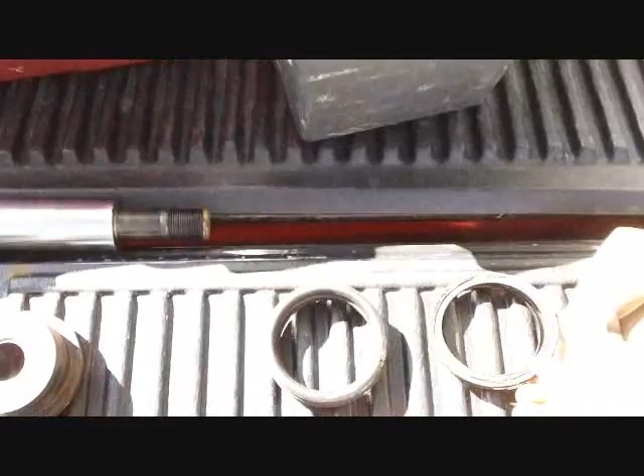Next up we look at this mess. Okay, so here's what we had in there. We had that type of chevron seal, almost kind of like a rubber cap. And then this material, another one of that, another one of that, another one of that, 4 of those, and then this big backing thing.

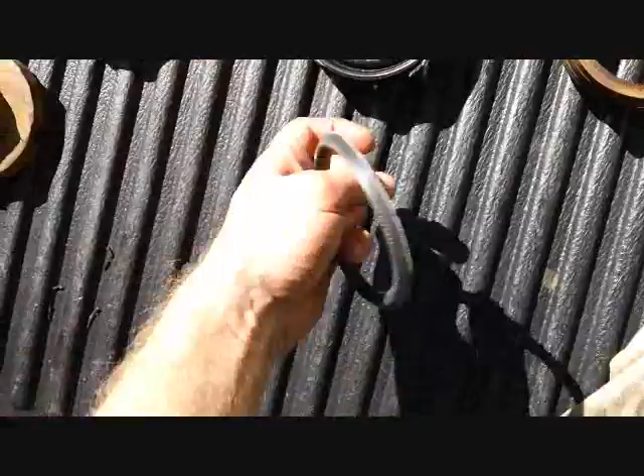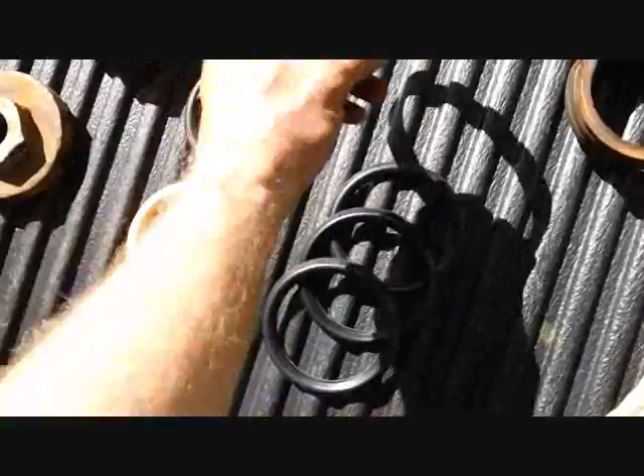So what did the good people at Mechanics Bliss give us? They gave us this solid looking ring, one of those, one of these, 2 of those, 3 of those, this rubber looking thing, 4 of these. Oh, that's different. Oh, wait a minute, hold on, what do we got here? This is solid, these aren't. This is different. What do we got here?

That. Oh, okay, that. 1, 2, 3. Alright, so we got these 3. Look like these 3. Let's do it this way. Old up top, new down bottom. Then we got, alright, this one, it's deformed, but it looks like this one. Alright.

And there's this and this. This is this. So then this big mess right here is, oh okay, it must be this gets put together with this to make that. Well, I don't like this. Oh, we got another potential problem here.

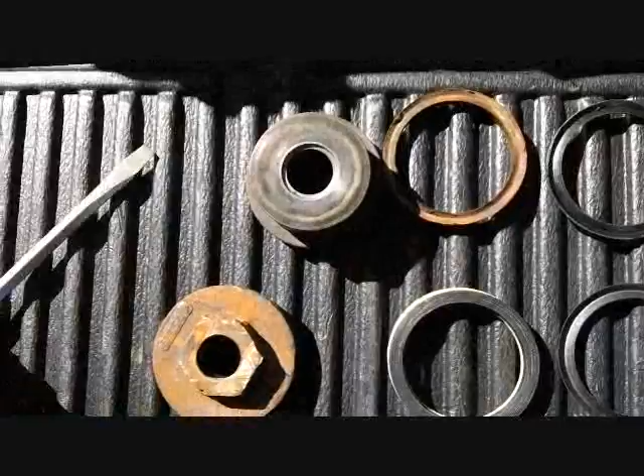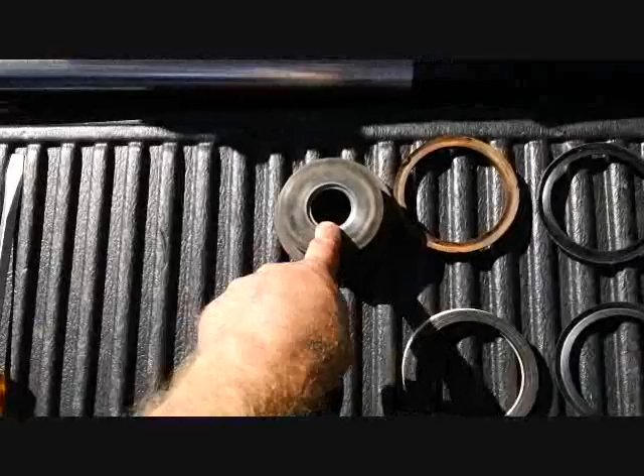I think when we took this apart at Gary's, what was in there for seals and everything was pretty shredded. But it almost seems to me like there might have been remnants of an O-ring that went in this groove. How critical that's going to be, I don't know. Since I am lucky enough to have the parts manual from the original Ware setup, I wonder what that shows.

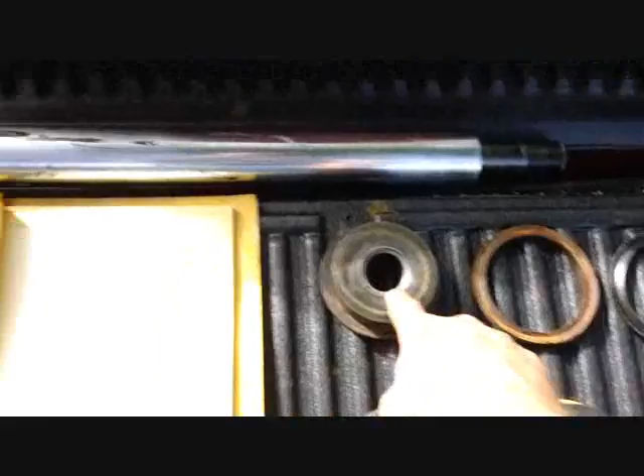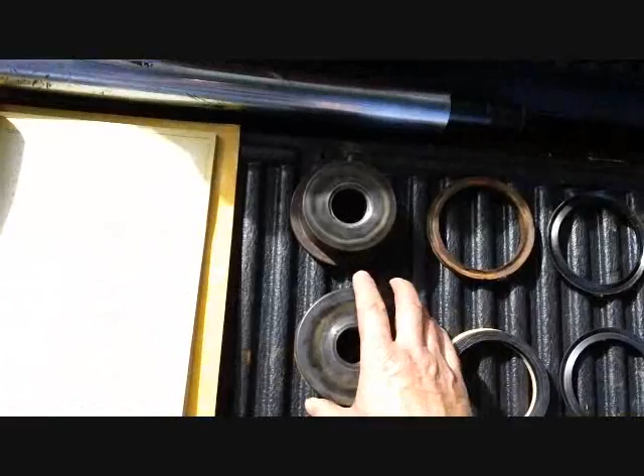Alright, so according to the instructions here, it wasn't evident right away, but when I read through it the second time I realized that, yeah, they make reference to an O-ring. So it looks like the O-ring goes in this groove, and then when this is tightened down, the O-ring is compressed in between this discolored area right here and in the groove to create a seal. So apparently nothing seals between that edge and there.

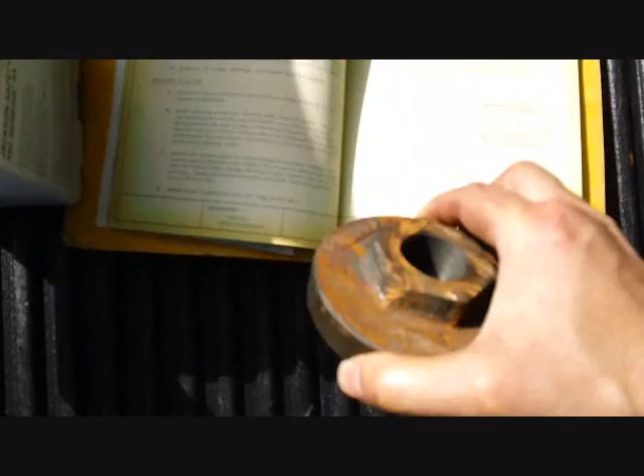So I guess any oil that works its way down that bore is stopped by the compressed O-ring, which I'm assuming they're figuring it'll be a negligible amount, otherwise they wouldn't rely on just an O-ring to do it. Disassembly of Ware cylinders: clamp the cylinder in a vise, loosen top nut. That's this. It's interesting, they almost talk about the top nut as being a separate piece than the ring here.

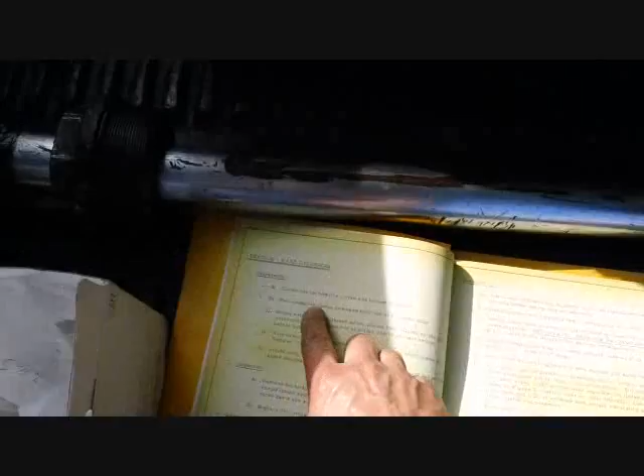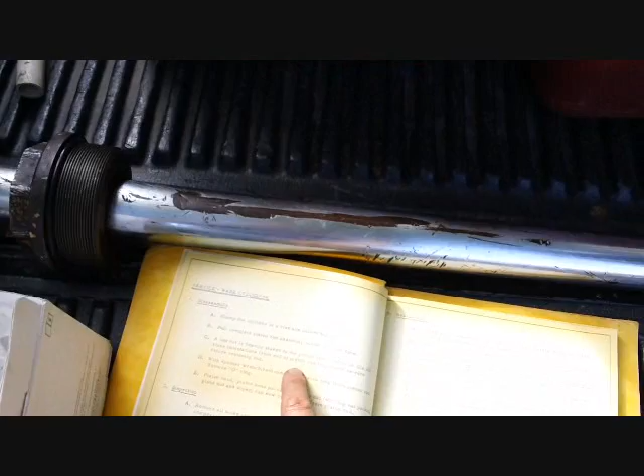Clamp the cylinder in a vise and loosen top nut. Pull complete piston rod assembly out of cylinder. A hex nut is heavily staked to the piston rod. Grind or file off stake indentation from end of piston rod to prevent seizure before removing nut. With spanner wrench, remove compression ring from piston rod. So that's almost like they're saying this would be a separate piece than this, but it's not. Okay, so they're talking about this is the compression ring.

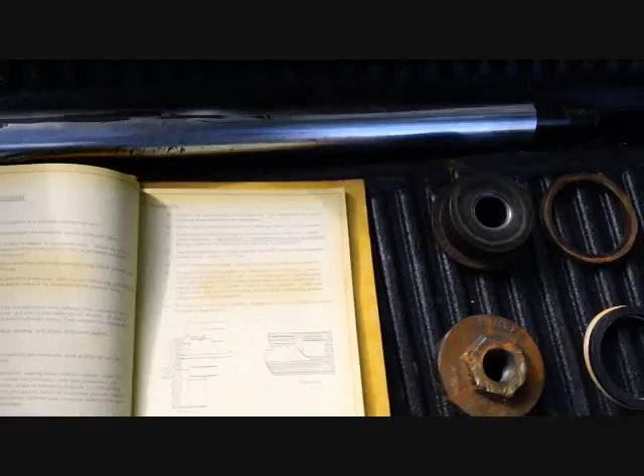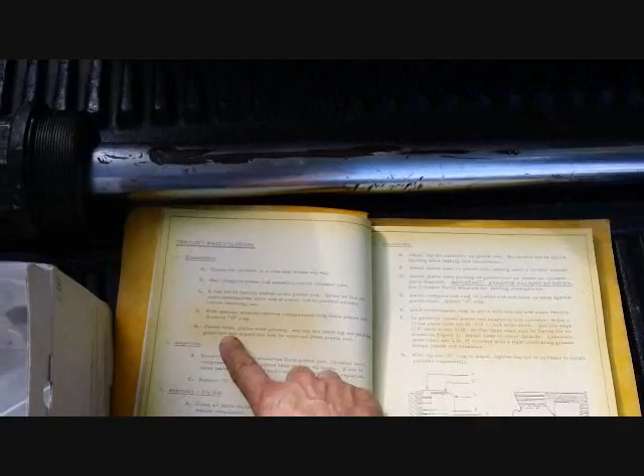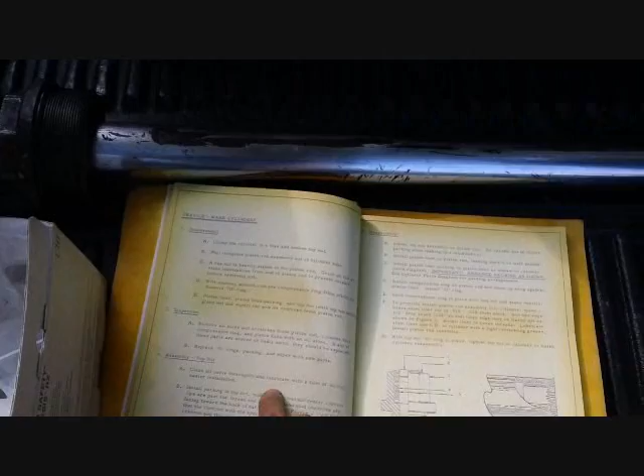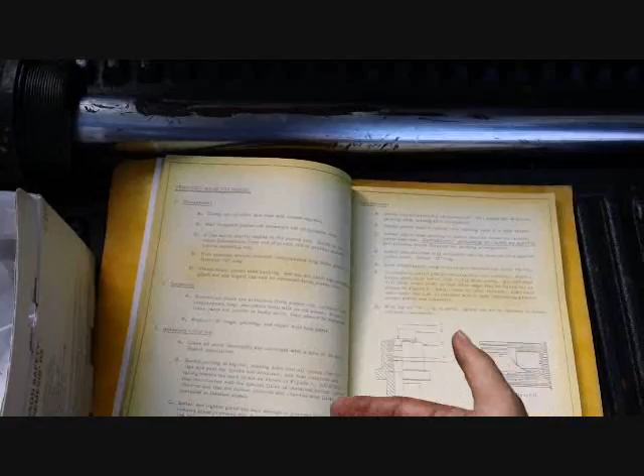Let's see. At that point, the piston head packing, and top nut, with top nut packing, gland nut and wiper can now be removed from the piston rod. That's where we had all that stuff off. It talks about blah blah blah. Replace the O-rings, the packing, and wiper with new parts. Assembly of the top nut: clean all the parts thoroughly and lubricate with a film of oil for easier installation. Install packing and top nut. Talks about what we talked about, the chevrons, making sure which way they go, what side the solid rubber filler is supposed to be on, all that.

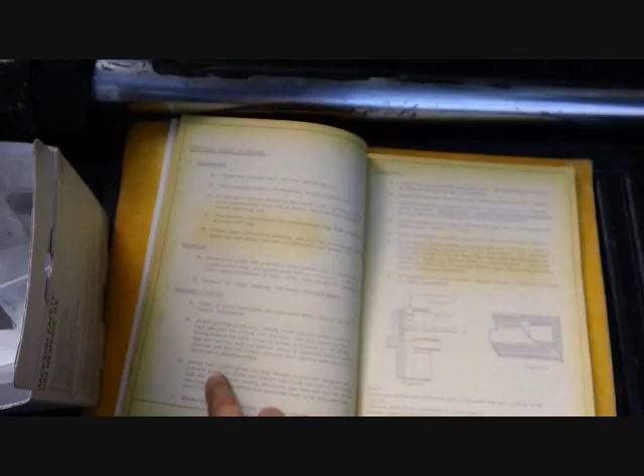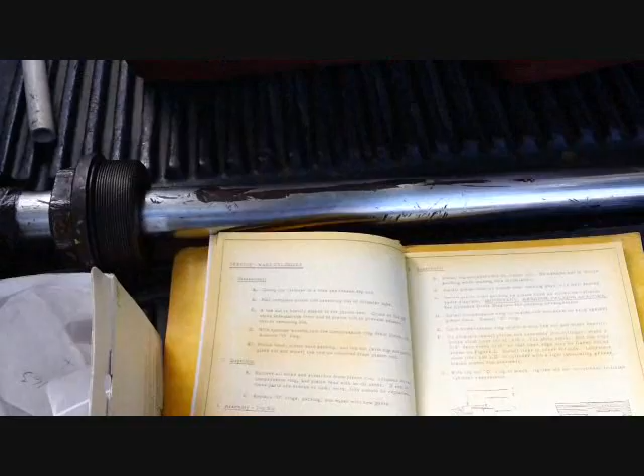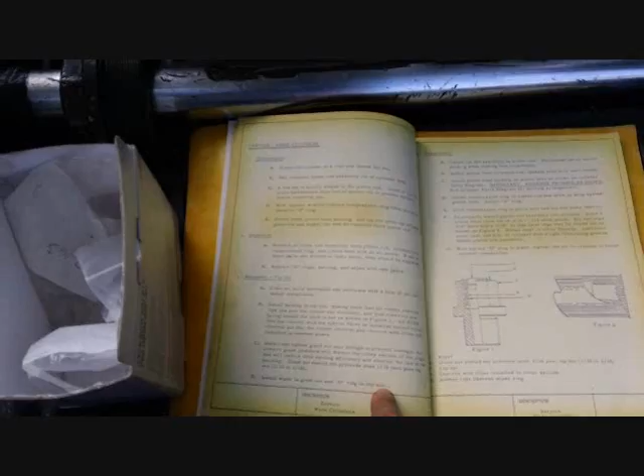Install and tighten the gland nut only enough to prevent leakage. Excessive gland pressure will distort the cross-section of the rings and will reduce their sealing efficiency. So we don't want to do that. Goes on to say the gland nut should not protrude over 1/16 of an inch past the top nut. We'll have to check that later. Install wiper in gland nut and O-ring in top nut. Okay, so that's the wiper that they're talking about.

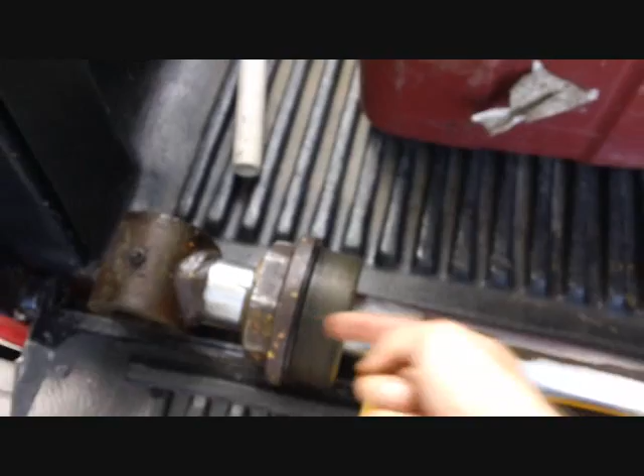And the top nut O-ring they're talking about is this one, which was a flat piece of rubber when I took it apart, but maybe it was just a completely compressed and squashed out O-ring. Either that or the previous people put the wrong thing in there. Install the top nut assembly on the piston rod. That's what we did there. Install piston head on piston rod, making sure it is well seated. So this is the piston head onto the piston rod. Make sure it's well seated.

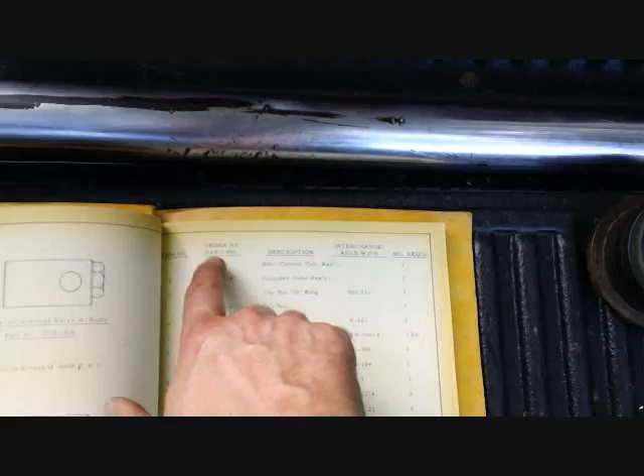Install piston head packing on piston head as shown on cylinder parts diagram. And it says important, arrange packing as shown. See cylinder parts diagram for packing arrangement. Now, oddly enough, I've been through this whole book twice and I cannot find the diagram. All I can find is this list in the back here, which this particular list is for the bucket control cylinder assembly. And then there's different ones for all of them. There's the dipper stick, there's the lift cylinder.

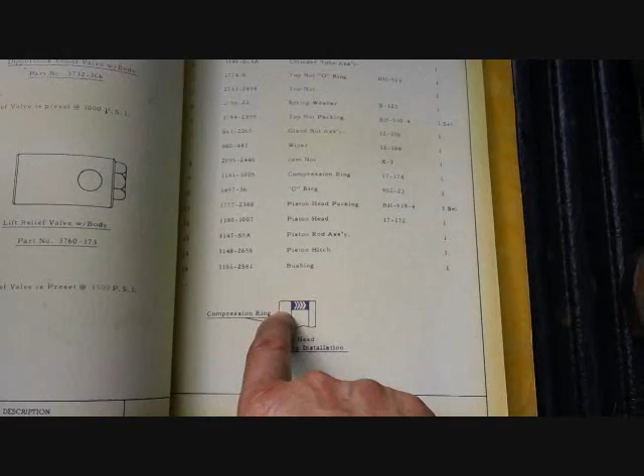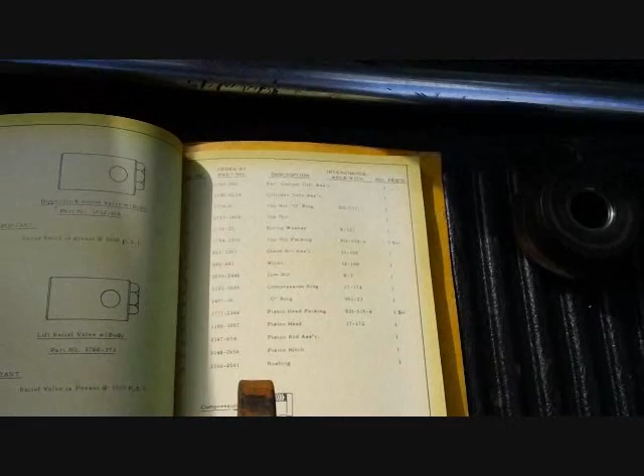So we want the bucket control cylinder assembly, and down here at the bottom it shows a little diagram and it says the piston head packing installation, and it explains that this is the compression ring, and it goes on to show how these are all installed. So that's interesting because they're showing the compression ring. Let's see, so that's going to be this. It's showing it this way. And it's showing the chevrons facing, the points of the chevrons facing that way.

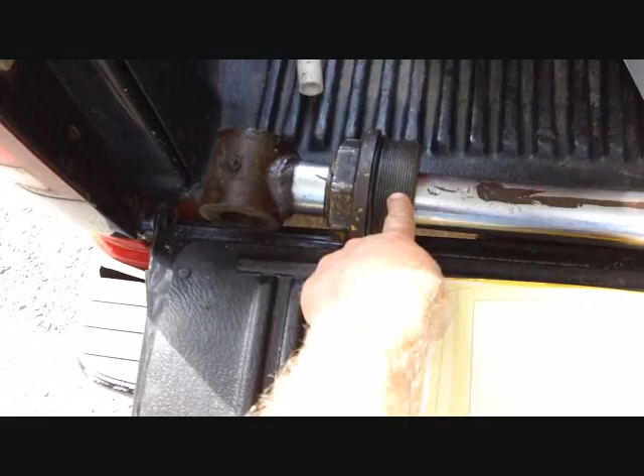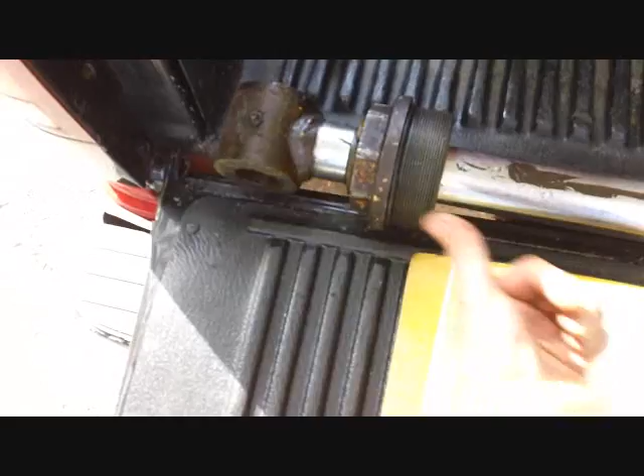So where's maximum pressure coming from? Hold on a second. As I stopped to ponder this question, I just realized how silly I must have sounded before when I was talking about what side the pressure is coming from when I was installing the top packing. Obviously the pressure is coming from this side. There is no pressure on this side. This is atmospheric pressure out here. So all your pressure is coming from this side. So all of those chevron points should have been facing up when I installed them in here. And I'm going to have to double check that on video because I already forgot. But I'm pretty sure I got it right.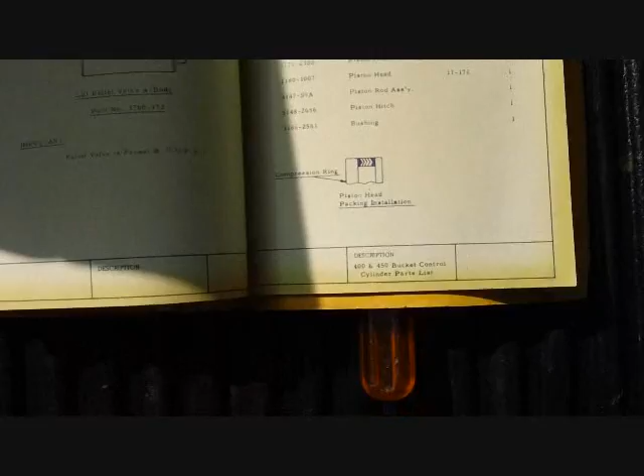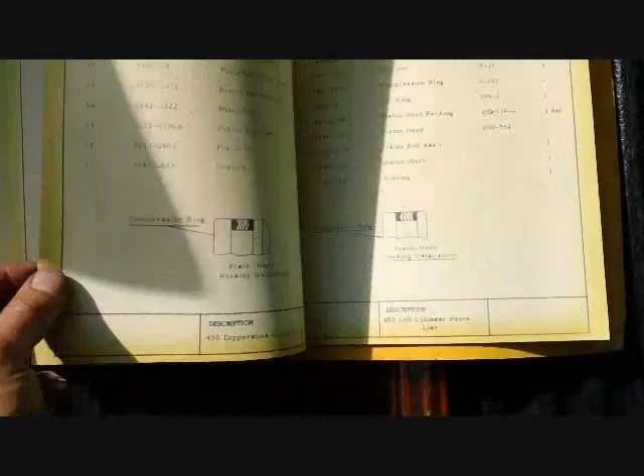Well, that explains why they don't give you a diagram for the top nut packing, because they figure you must know how to do that. This, on the other hand, is completely different. They give you a different diagram for each cylinder. Depending on which way the cylinder is under the most stress, that's going to determine which way these chevron seals are put in. But I think this is counterintuitive to what it should be.

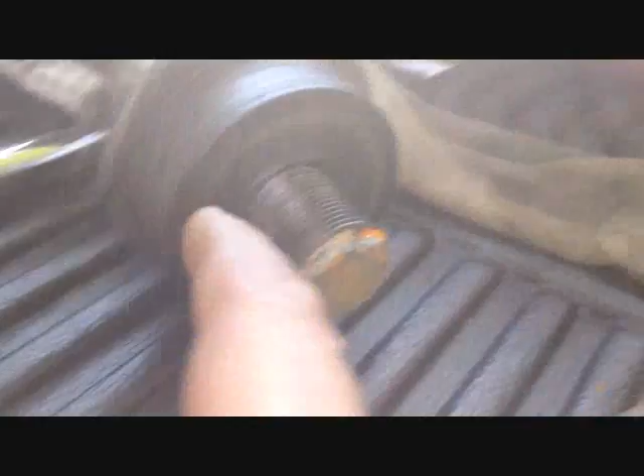Alright, just got back from the hardware store where I was able to procure the correct size, nice fitting O-ring in there. It's just proud of this surface, which is perfect because that means when I tighten this down and that surface presses on it, it's going to compress the O-ring in there and make a good seal.

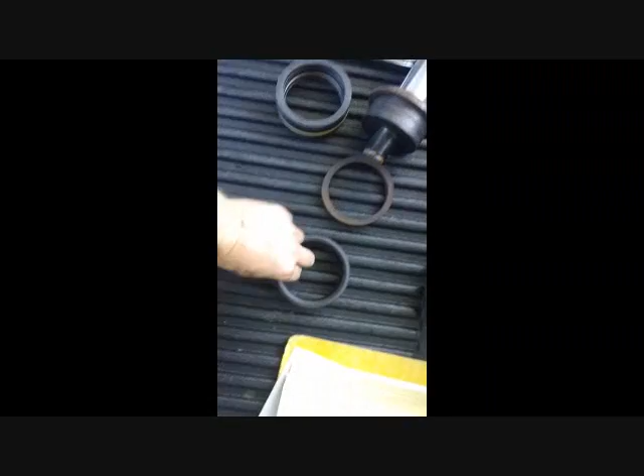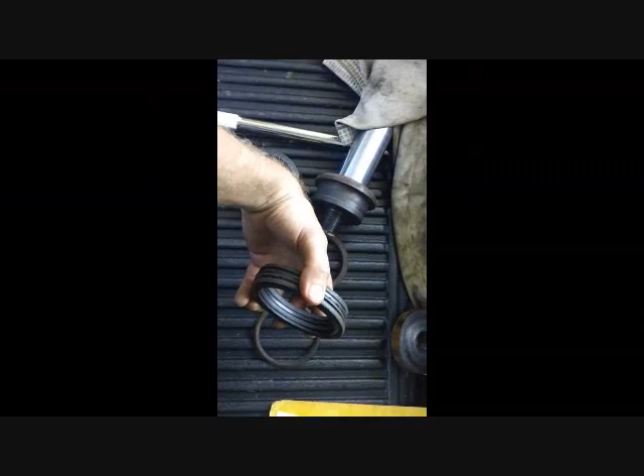Alright, so I was able to figure out how this old setup went together. It went on like this. I've got everything reassembled temporarily just to show you that this ring goes on first, and then the chevrons go on facing this way. So this back cupped section is facing towards the compression ring, and that makes perfect sense because we are under maximum pressure when the cylinder is extending, and that means that this back side of the chevron is being pushed. Pressure is pushing this ring, and that's going to make this seal even tighter. So that's the design.

But also what's interesting is you've got this ring first, then one of these chevrons, then the rubber one, then another chevron of the other material, then a third of the other material, and then the backing ring. So you get the backing ring, there are 3 chevrons of whatever this weird material is, and then there's a rubber one. So the question is, where does the rubber one go?

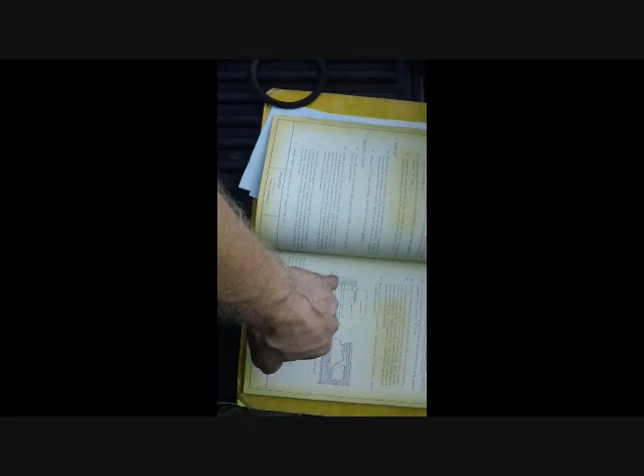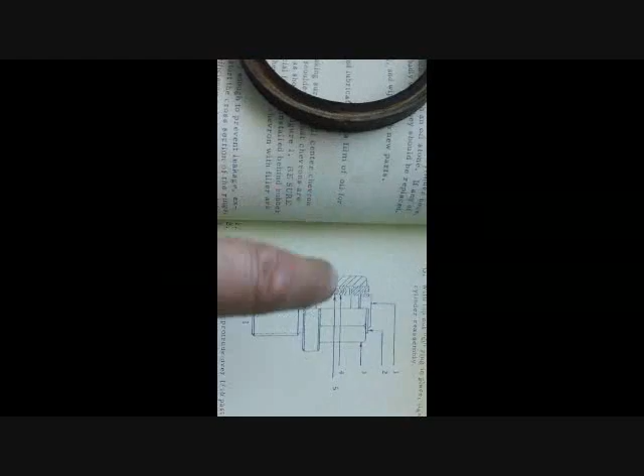The best that I can ascertain is from the picture back on one of these other pages. Yeah, right here, there's a diagram, and it shows that this is an assembly of 6 separate pieces. It doesn't label all the pieces, but we know that's going to be that very top piece there. That little piece right there is going to be this. And then it tells us right after that is number 4. It says a chevron with filler installed in center section.

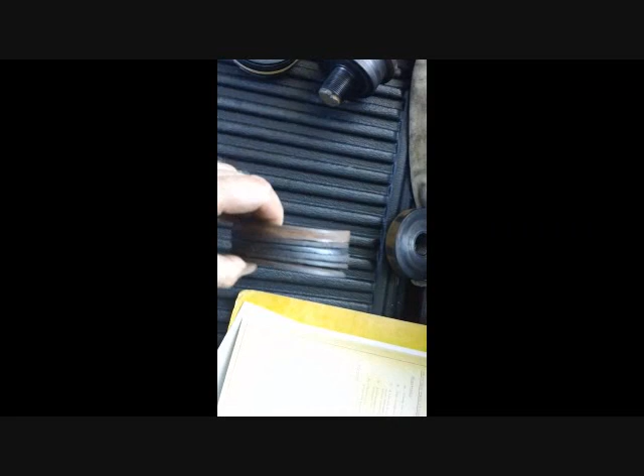Well, none of these chevrons appear to have anything making me think it's a filler, so I think they're talking about something else. And then the key here is number 5, rubber type chevron wiper ring. Well, this is the only one that's kind of a rubberized material, so that's why I think the way this went together was this ring, a chevron, a rubber ring, a chevron, backing ring, which would make a sandwich that looks like that. And I'm pretty sure that's what we had on there before we took it all apart.

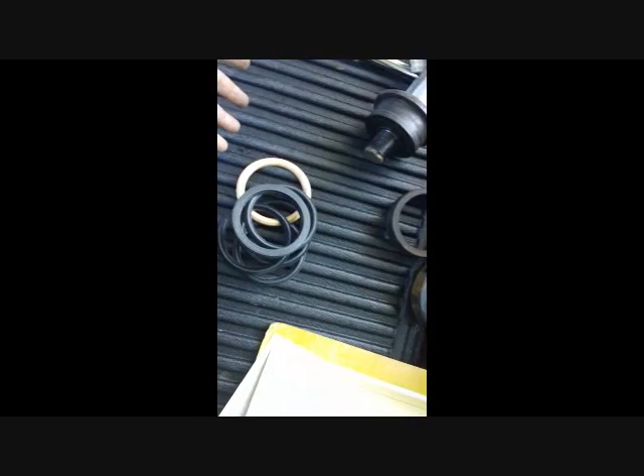So now the mystery is, what do we do with this? Because this, we have 7 pieces. This, we know this is going to be this. It's a little bit smaller. So I'm assuming that maybe that's why I got another piece here to make up for the difference in thickness of these two. So this is going to go on here. Then we put on one of these type of chevrons. It's almost like some kind of material that's permeated with rubber, but it's really tough stuff, like a tire.

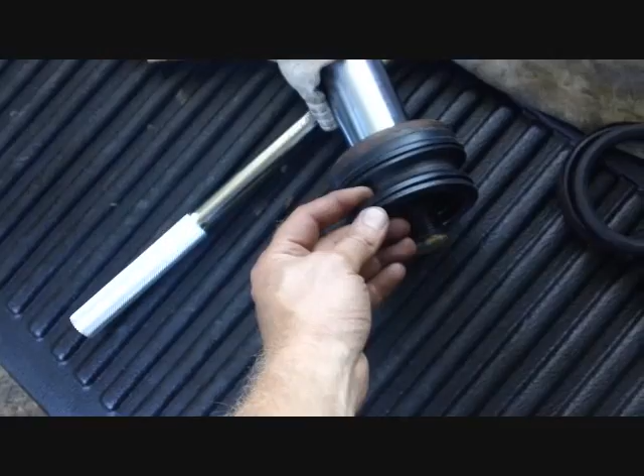So next, if we go by the original playbook, we should be putting on the rubber style chevron, which is this one here. Next, if we did it the old way, we would put on the 2 other chevron seals, and then the backing ring. So the question is, where do we put this? So what I've decided to do, because I don't know, is put on one more chevron, then this ring, then the other chevron, then the backing ring.

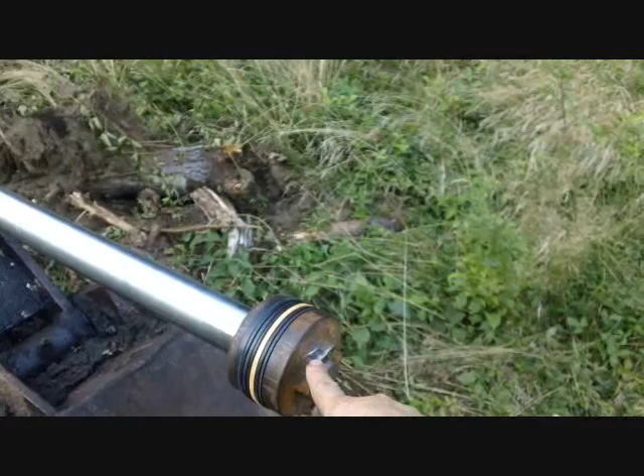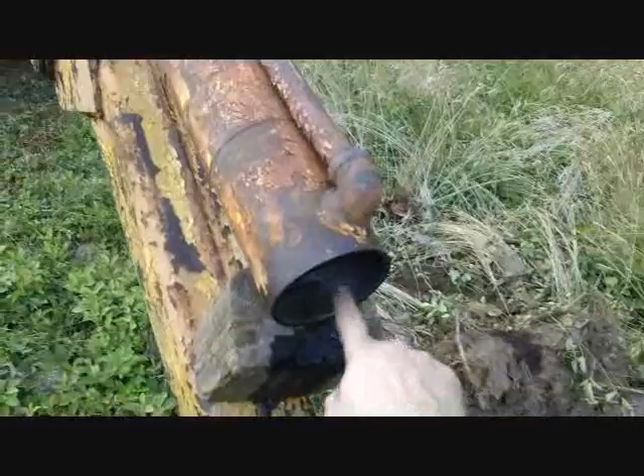Alright, it's after supper. I just tightened this down as tight as I can with my breaker bar and a helper pipe on there, and I restaked it. Now I'm ready to install it back in the bore. The trick is, because these are flared out, it's hard to get them past these threads without the threads cutting and damaging the new seals. So the key here is a lot of lubrication, and what they recommend in the installation manual and the wear manual is that you cut a piece of thin shim stock. I don't have any shim stock, so hopefully this piece of sheet metal I cut will do the trick.